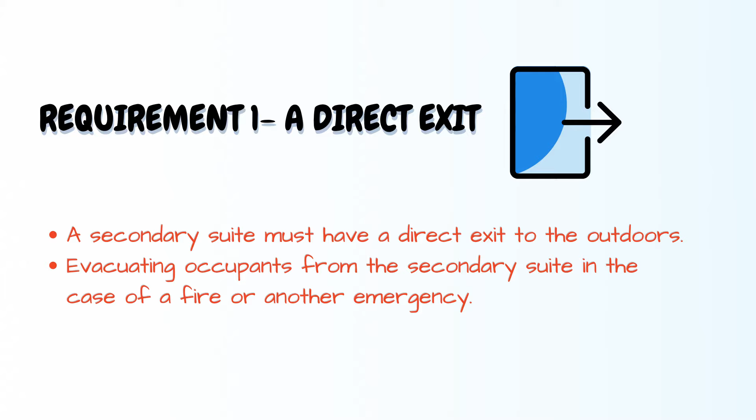So the first basic requirement is to have a direct exit to the outside. So this means there should be a separate entrance door that directly leads the basement occupant to the outside in case of fire. Now the second requirement is the ceiling height. So it is 1.95 meter or 78 inches of height for unfinished basement.

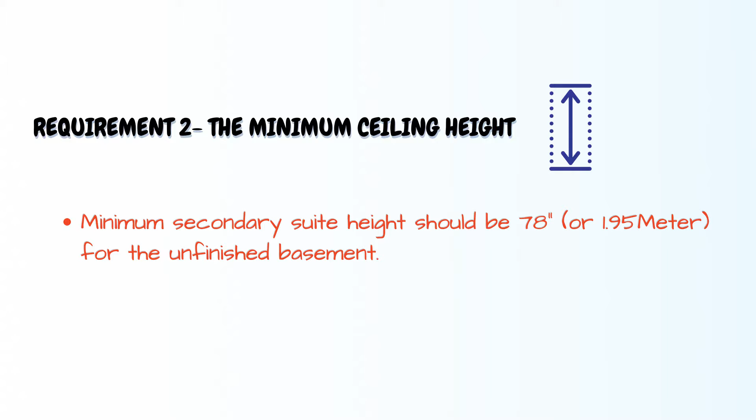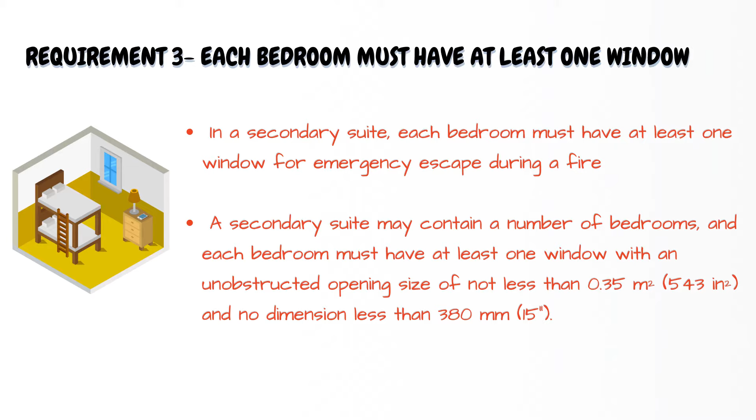And now the third requirement is that each bedroom space must have one minimum window and it must be of unobstructed size, not less than 0.35 meters square or 543 inch square. And the minimum dimension that it must have is 15 inches. So now, as mentioned, for the measurements of the basement window that must be in your bedroom, so the opening, that means the slider part, if this one opens completely, the open portion should not be less than 543 inches square.

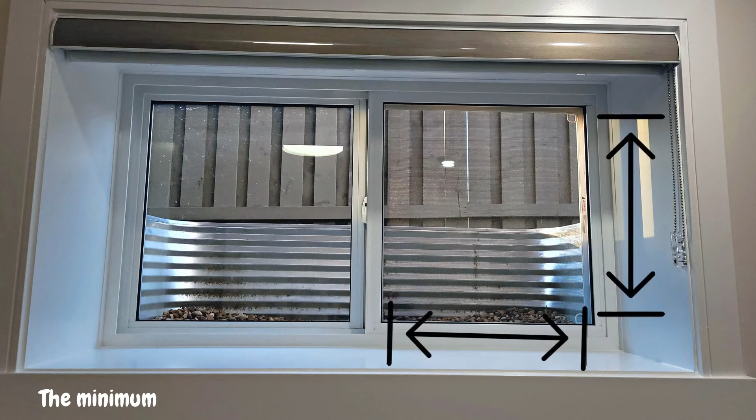Okay, and then the minimum dimensions for the window, either the top or the sideway that opens, should be 15 inches. I measured the window, so from top to bottom, this window is 26.5 inches, and from this side to this, it's 24 inches. So now if I calculate it, it goes to 636 square inches. So we meet the guideline in that way. And then also, as per the other guideline, the opening should not be less than 15 inches. So in that case, this side is 24, this is 26.5 inches. So we meet that guideline as well.

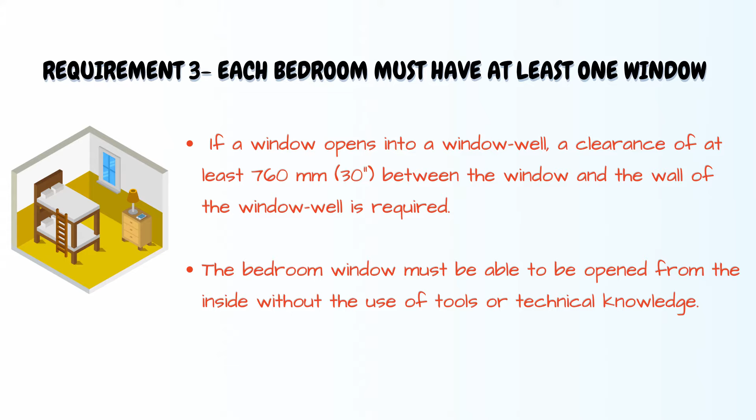And now we will talk about the window well guideline from the outside. So now the second code is that the window, that's the opening here, and that point and the window well, that axis should be minimum 30 inches. So when I measure it, I'll show you. So it is set at 30.5 inches, so you're safe to go.

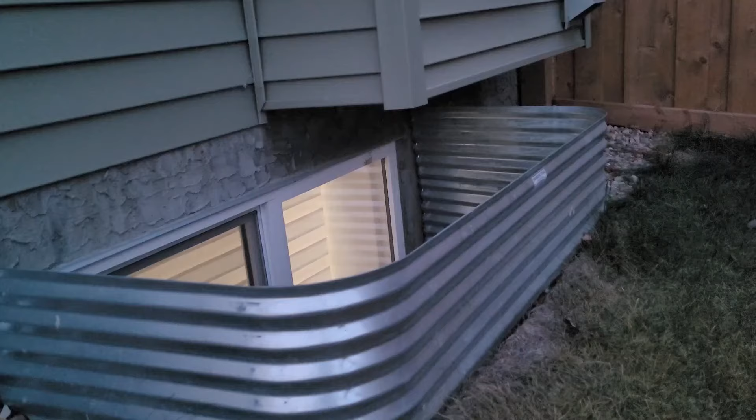Then there's another scenario. Sometimes it happens that there's a cantilever above the window, so we will discuss that as well. So now there's another example here. If you see on the fixed side of the window, there's a cantilever, but if that cantilever was on this side where the slider opens, then it won't pass the inspection, right? So if you see now the access where a person or an occupant needs to come out, it's completely open, so you will be safe with this kind of window.

And he just wanted to say hi.

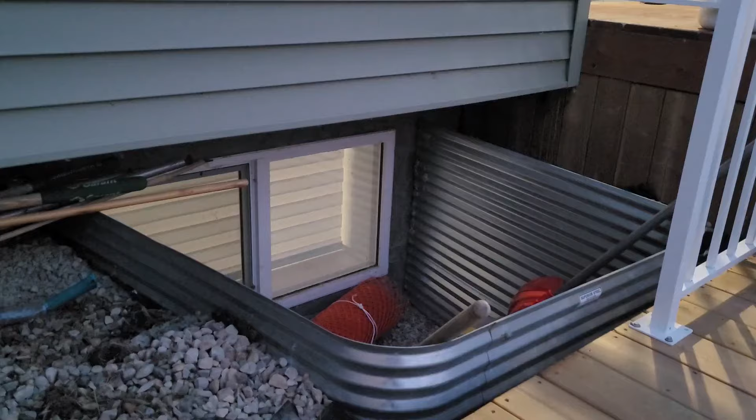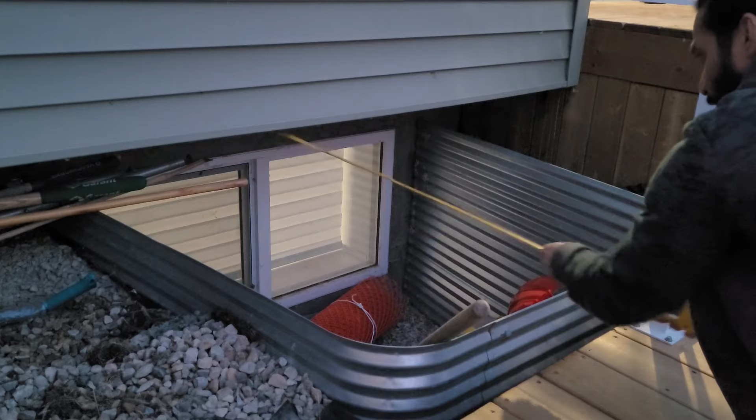Now if you see this window, it's completely covered by the cantilever. So if the window well was normal here, it won't pass the inspection. So now the window well is extended. So I will measure it and tell you how long it is. So this window well is 58 inches. So that means now after the cantilever, there is enough space for us to pass the code and inspection.

So now the three things we just discussed, that's the outside door, ceiling height, and the window in your bedroom, are the minimum requirements that you must look for before starting your basement or before applying for the permit of your basement. And now we will discuss more that you will need to add in your secondary suite, and I will explain those as well.

So now the first one will be your mechanical room. So the mechanical room, where there is a furnace and hot water tank that can cause a possible fire in case of any malfunctioning, must be properly sealed and covered with half-inch drywall.

And if there's any place where you can't put drywall, like if there's any duct going on and you finish the drywall but there's still a space, you must seal it with fire-rated spray foam or fire-rated insulation to make the mechanical room properly sealed.

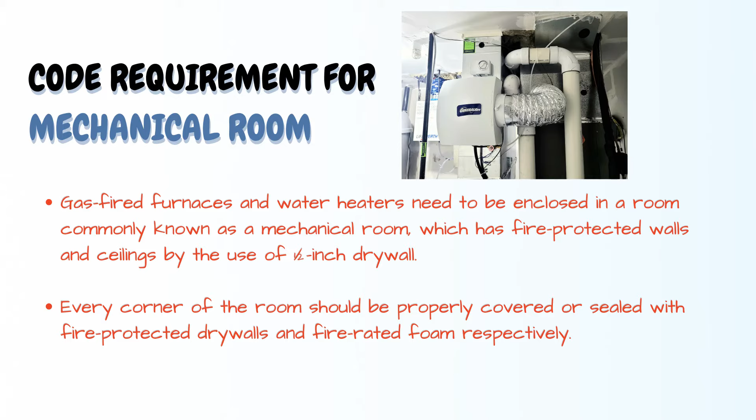And also the door leading to your mechanical room area or mechanical space must be 32 inches wide. Then doors in the smoke-tight barrier area, such as the mechanical room or any mechanical space, and also between the house and the basement, must be made of solid core wood 45 mm, which is a fire-rated door, and it should also be self-closing and sealed around with a weather strip.

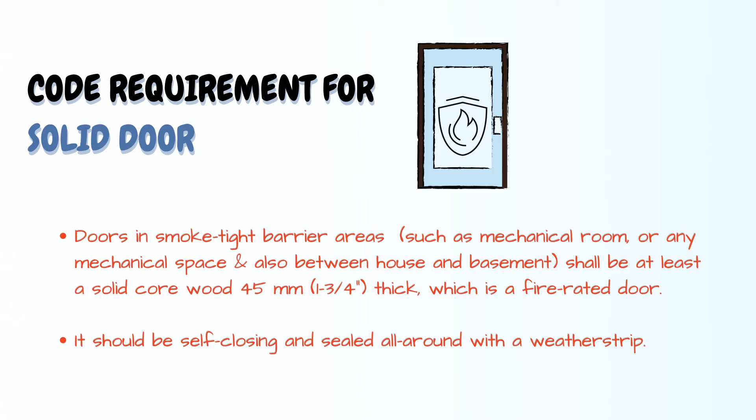As mentioned in the definition, the secondary suite is self-contained. So that also means that the secondary suite must have its own independent heating and ventilation system. For that one, the heating system can be anything. Homeowners can explore their options to minimize the cost, but the control for that heating system must be in the secondary suite, and it can be controlled by the occupant.

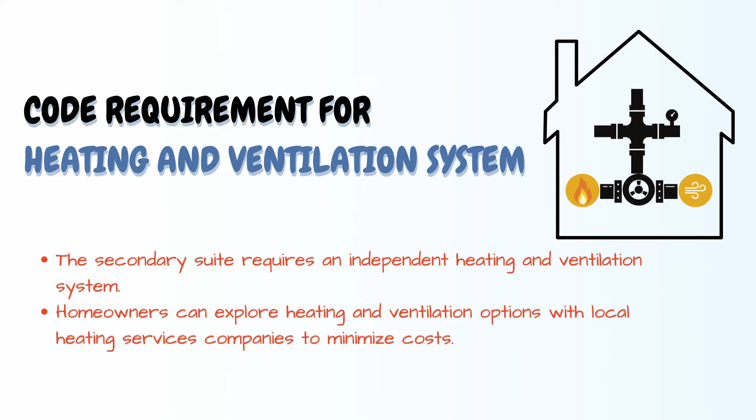And then the ventilation system is to minimize the contaminants in the basement air, especially if there are any fumes like radon fumes, cigarettes and all that stuff. So it must be quickly ventilated, so the occupant can control its own ventilation system.

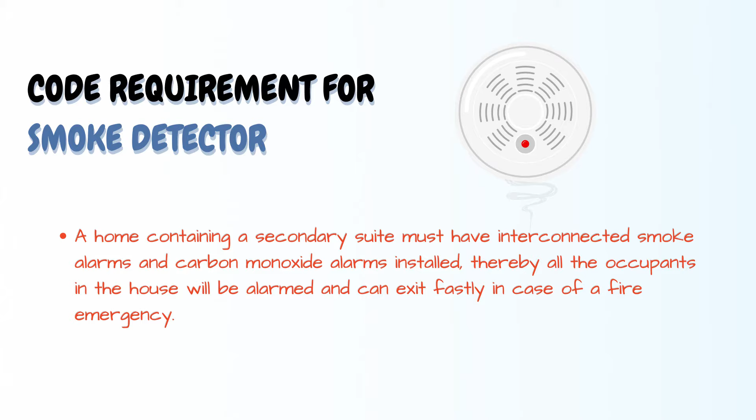Then also a secondary suite must have interconnected smoke and carbon monoxide alarms, interconnected between the basement unit and the main house. So just in case there's a fire on the main floor, in the main house or the basement, all the occupants of the house are alarmed and they can exit the property as soon as possible.

And there is also a code for sound transmission between the main building, which is the main house, and the secondary suite. So it has to be separated so that the noise transfer is minimized. There are multiple criteria. It can be either an engineer-stamped acoustic design that follows the minimum of ASTC 47 rating, or it can be finished with another method that has a minimum rating of STC 50.

And the simplest way is to follow what is called the prescriptive method, where you have to use batt, which is a sound absorbing material, so batt insulation. You fill it in the joist space, put resilient channels on the bottom of the joists, and then put the drywall on top. This will minimize the noise being transferred, but make sure that during this process the air return vents are not blocked by the batt insulation.

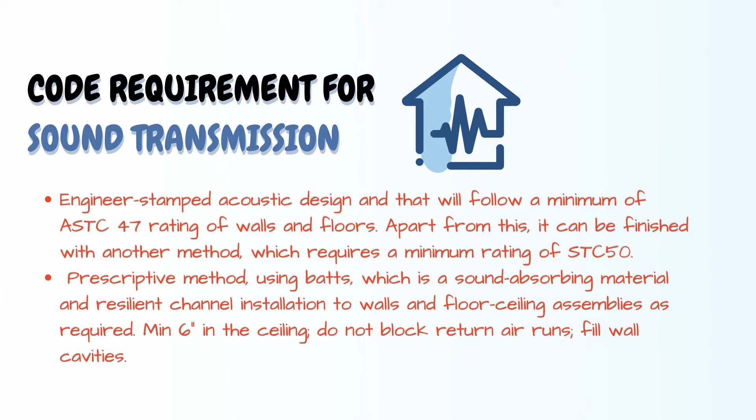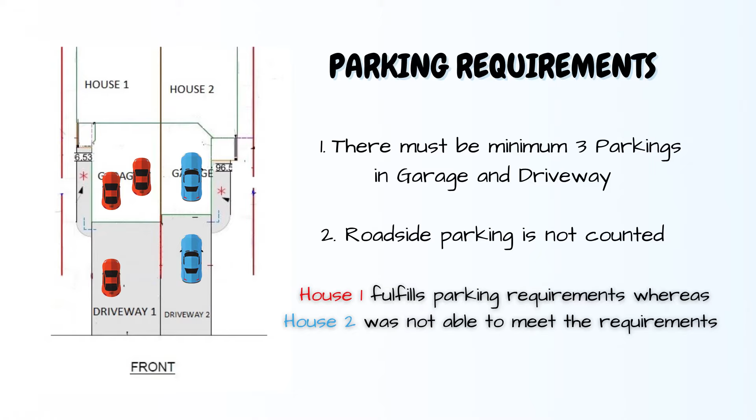There's also a requirement to have 3-car parking on your driveway and garage. As you see, house number 1 has a double-car garage, so 2 cars can fit inside and 1 car can fit on the driveway. But on the other side, house 2 has only a single-car garage, so 1 car fits inside the garage and 1 on the driveway. So this house will not qualify to get the permits for a secondary suite.

Now at the end, we will talk about the benefits of a secondary suite. It's a great benefit for homeowners, tenants, and even your community, or your city. For homeowners, building a secondary suite adds extra income which can help them with their mortgage. It raises the property value. Also, if you're reselling the house, a buyer will prefer a house with a finished secondary suite so they can rent it right away, or use it for their extended family.

And for tenants or the community, it's really an option as affordable housing. They are getting all the benefits of a house like a kitchen, washroom, all the appliances, everything, but at a lower cost.

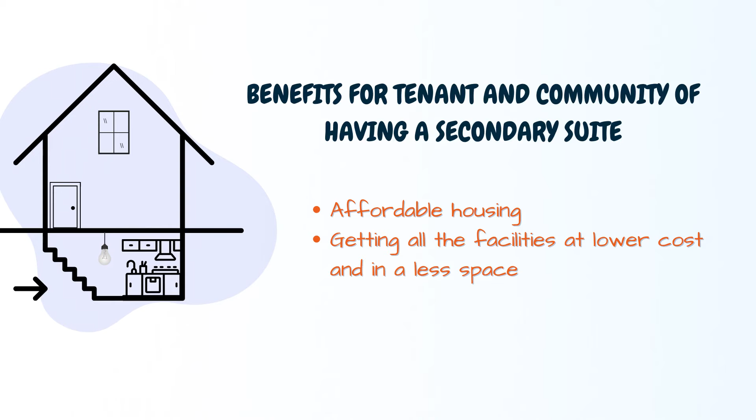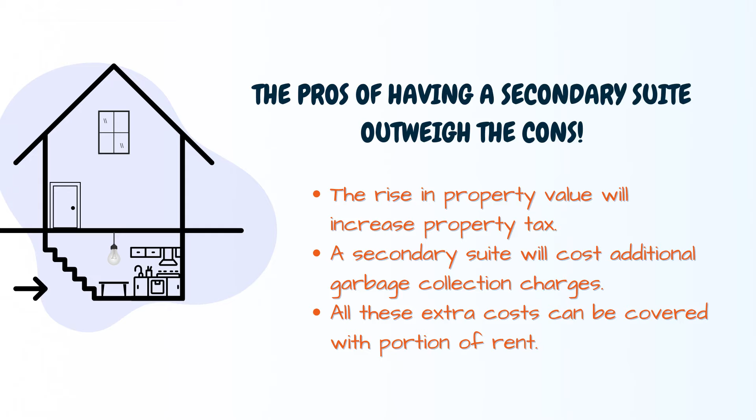Also, as a secondary suite comes with benefits, there's also a disadvantage, but if you look at it overall, it won't be. When you build a secondary suite, the value of the property goes up, plus there's additional property tax on your house because there's a second household now. And your cost for garbage collection will go up because there's a second address or second household as well. But this gets covered with the rent from your basement, and you can settle it out. I just wanted to mention that in this video.

Hope all the information provided in this video will help you to plan for your future secondary suite.